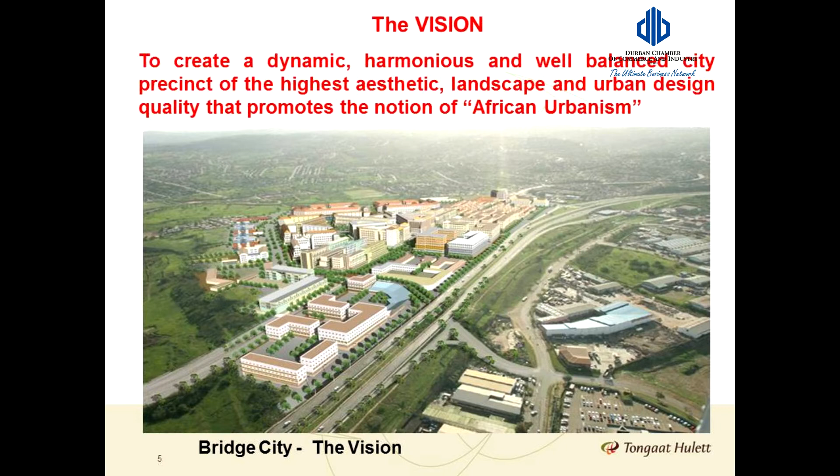The vision is essentially to establish a dynamic, harmonious and well-balanced city precinct of the highest aesthetic, landscape and urban design quality that promotes the notion of African urbanism. From the vision slide you can see the kind of bulk that we're trying to achieve in the town centre. It's high bulk, in fact higher than the Umhlanga town centre.

If you go on site today, you'll see the shopping centre with 2 levels, 48,000 square meters of bulk, with parking on top, and adjacent to that on the same site is the bus and taxi rank built by the city. You'll see the platform already established with foundations and piling built for the hospital.

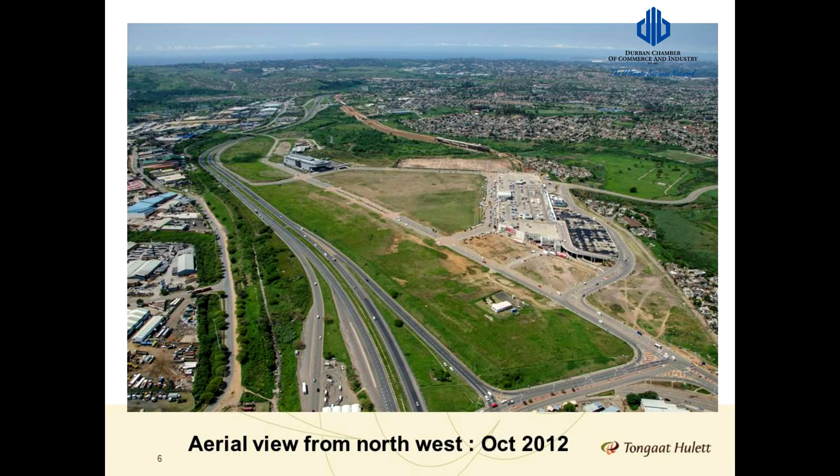You'll see the Magistrates Court, an iconic design building which we're very proud of, and in addition to that the government is busy putting in the rail line that will deliver trains in September this year into the underground station under the shopping centre.

The business estate is currently being sold. We've had some good effective sales, and we are hopeful to sell out by the end of this year.

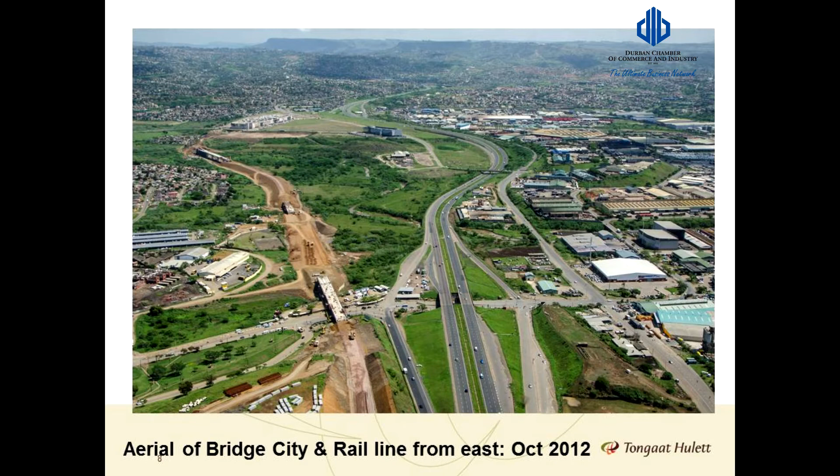The station building or station structure under the shopping centre is fully fitted out, ready and waiting for the trains to come rolling in September.

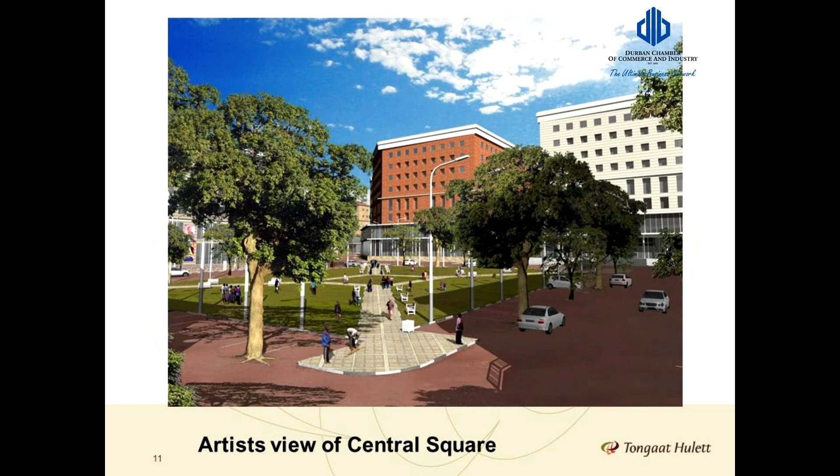There are some artistic views of the town square showing the relationship of the formal square to the buildings surrounding it, roughly 5 and 6 stories high, as well as how the buildings interface with the Bridge City Boulevard and the planting, and the most important component being the pedestrianisation of the boulevard and the pedestrian ways that lead throughout the town centre.

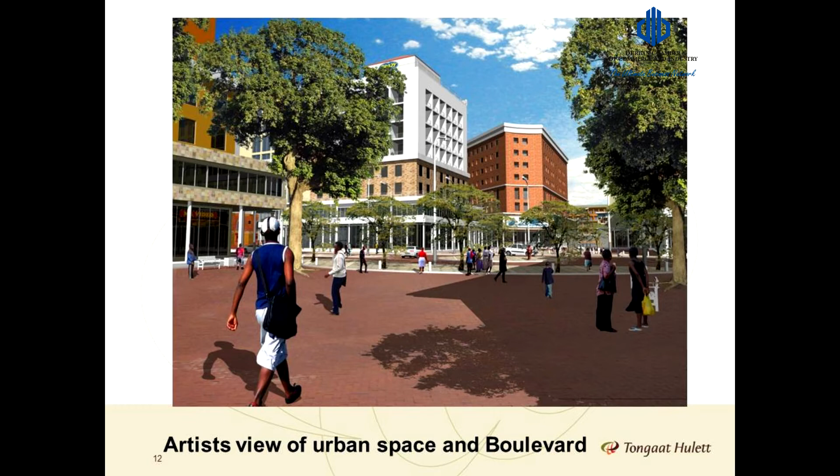The IRPTN, or the Integrated Rapid Public Transport Network, comprises fundamentally a rail line and a station, which is underway, and the BRT or Bus Rapid Transport System that will deliver big buses into the existing bus and taxi rank. 3 eThekwini routes converge on Bridge City, and all 3 are going to be started by the end of this year, with a 2.5-year construction period. We estimate in excess of 100,000 people per day going through the intermodal facility.

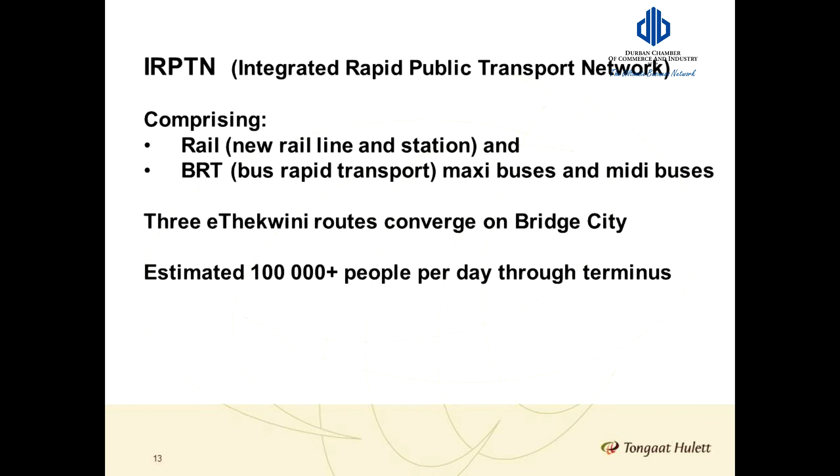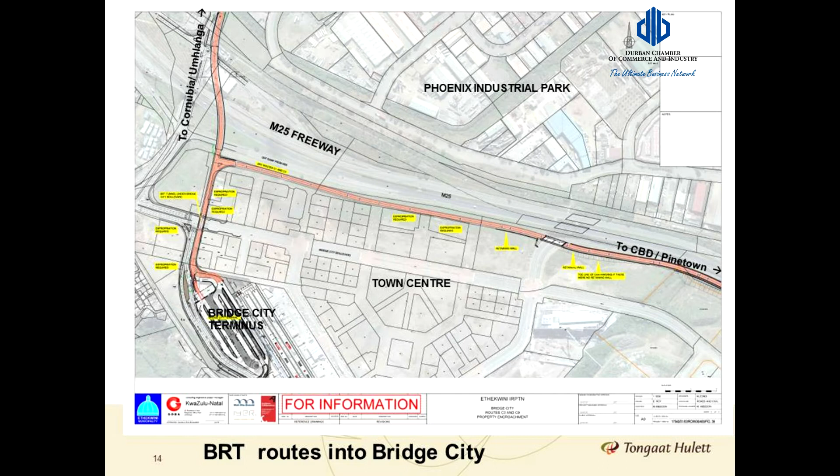The bus routes essentially are going to be located alongside the M25 freeway, and then we'll go underground into the bus terminus next to the shopping centre. The routes that will be constructed as phase 1 by the city is the northern route going to Cornubia and Umhlanga town centre, the western route going up to New Germany and Pinetown, and the southern route going all the way into the CBD of Durban.

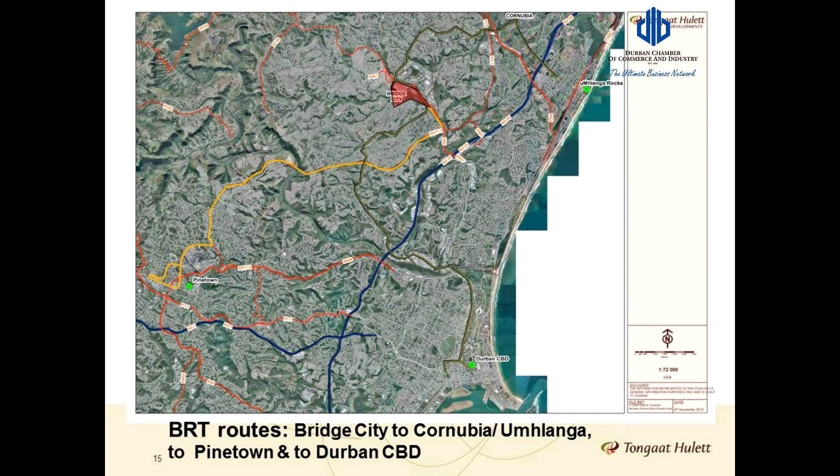Roughly 50% of the sites by area have been sold, and I would estimate that roughly 35% of the bulk has been sold to date in Bridge City.

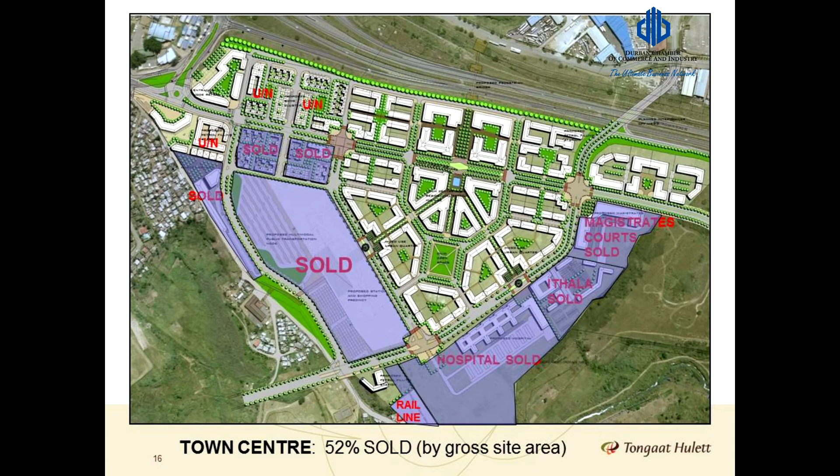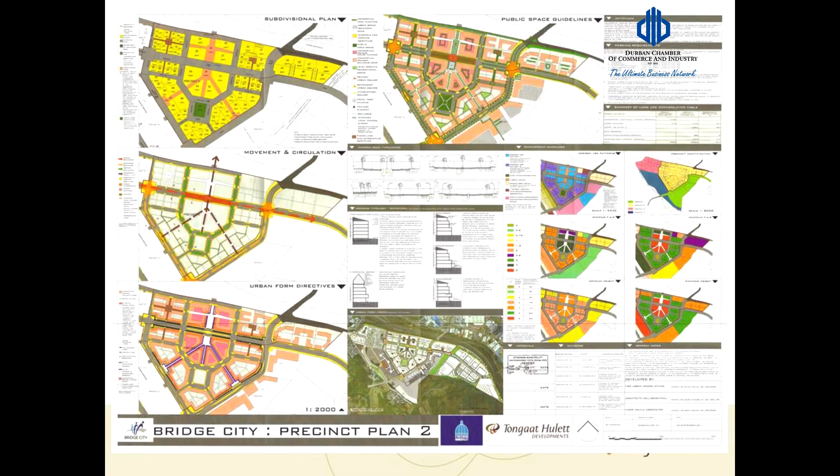The framework plan shows the beautification we propose and the planting scheme, so it's not going to be a barren vision. It's going to be a people-friendly vision with lots of planting and urban spaces. On the business estate...

75% of the area has been sold, with remaining, I think it's 3.2 hectares still available for sale.

Precinct plans are being created for all the different components in Bridge City, which essentially takes the town planning scheme controls and puts them into pictorial form, from which any developer can understand exactly what is permitted to be built on any site.

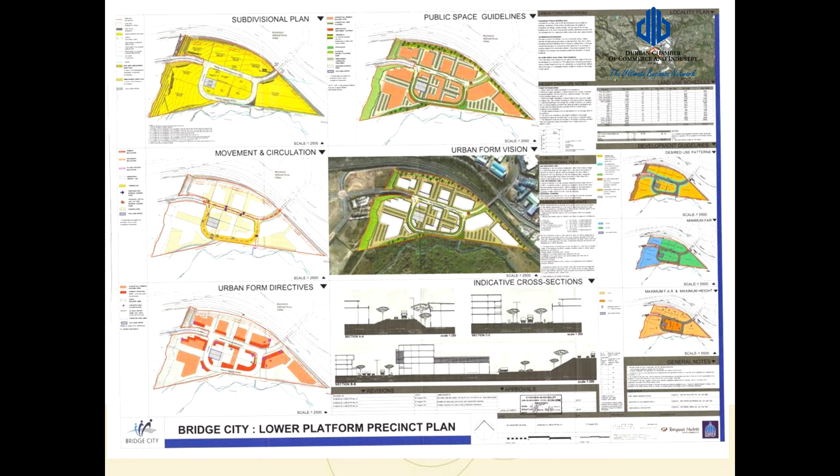Why are we all here today? Essentially, it's an opportunity not to be missed. All the sites in the town centre are serviced, saleable and developable.

The Regional Magistrates Court is completed and opening shortly. The Regional State Hospital, we're hoping that top structures will start by the end of the year.

Importantly, the public transport system, in terms of the rail station being completed and the rail line being constructed, all opening in September this year. And the BRT routes have been finalised, with construction due to start by the end of this year with a 2.5-year construction period.

Again, we estimate in excess of 100,000 people per day will go through the intermodal facility.

Essentially, Bridge City will provide exceptional public transport to the whole region, and specifically to the town centre. There are servitudes that ensure access for pedestrians throughout the town centre and from the intermodal facility into the core of the town centre.

The shopping centre itself, as constructed by Crowe Projects, is very successful, and you only have to go there to see the number of people that go in and out of the centre every day.

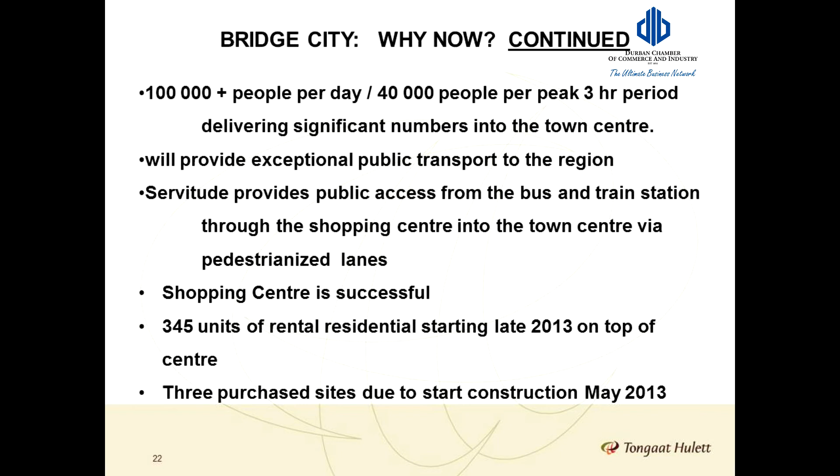The residential development on top of the shopping centre is likely to start before the end of this year, and will, we understand, comprise 3 or 4 phases, starting with rental stock.

The Management Association of Bridge City is established, up and running, and has a security presence in the town centre 24 hours, 7 days a week. It also currently maintains all the public spaces and roads.

We believe Bridge City is the best value for your square metre in eThekwini. The town centre is priced at a base price of 950 Rand a square metre bulk, up to 1.5 FAR - that's a deemed base price. The remaining permitted bulk on any site is priced at 300 Rand a square metre bulk for residential.

The business estate is essentially similar to Riverhorse, and we're looking for retail, warehousing and offices. 75% of the area has been sold, with 3.2 hectares still available for sale on 5 sites. There's great visibility from the M25 freeway, and it's directly opposite Phoenix Industrial Park.

Prices there are 1,400 Rand a square metre platform. Just contact Sue Mayer or myself if you have any inquiries.

Importantly, we need to note that the design review panel from our side meets with any purchaser and their design team at concept stage to agree on the concept, the best sites and the form of development. The design review panel must approve site development plans and building plans before submission to eThekwini Municipality.